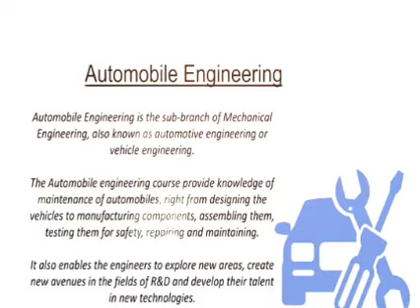It has a brief but vast history, so we'll discuss it one by one. The first automobile powered by an IC engine was invented and designed in Germany during the 1880s. Second, Henry Ford founded the Ford Motor Company and started an era of US leadership in auto production. Ford introduced the Model T, which by 1913 was being manufactured through assembly line techniques.

By 1920, General Motors had become the world's largest auto manufacturer. In 1897 the first car ran on Indian roads, and Hindustan Motors was launched in 1942. Mahindra and Mahindra was established by two brothers in 1945.

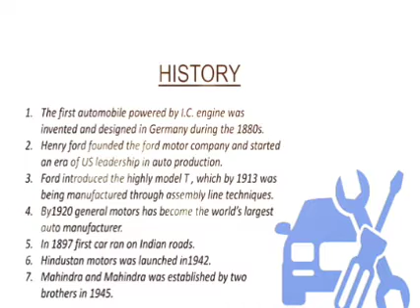Now we'll see the classification of automobiles. Vehicles can be classified on different basis, such as on the basis of load: heavy transport vehicles like trucks, buses, etc.; light transport vehicles like pickups, wagons, etc.; and light motor vehicles like cars and jeeps, etc.

On the basis of wheels: two-wheeler vehicles, for example scooter, motorcycle, scooty, etc. Three-wheeler vehicles, for example auto rickshaw, three-wheeler scooter, and tempo, etc. Four-wheeler vehicles, for example car, jeep, trucks, buses, etc. Six-wheeler vehicles, for example big trucks with two rear axles, each having four wheels.

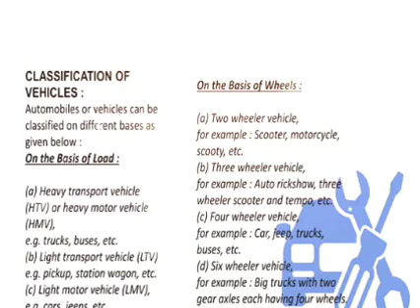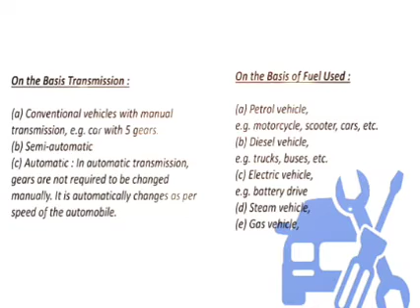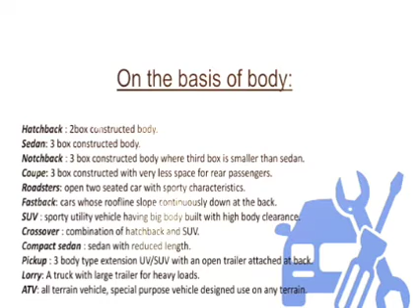On the basis of transmission, and on the basis of fuel used: petrol vehicle, diesel vehicle, electric vehicle, steam vehicle, gas vehicle. And on the basis of body: hatchback, sedan, roadster, fastback, SUV, crossover, compact sedan, pickup, lorry, ATV. Now we'll see the components of automobile.

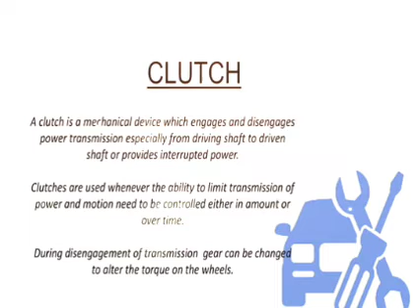The first component is clutch. It is a mechanical device which engages and disengages power transmission, especially from driving shaft to driven shaft, or provides interrupted power. Clutches are used whenever the ability to limit transmission of power and motion needs to be controlled, either in amount or over time. During disengagement of transmission, gear can be changed to alter the torque on the wheel.

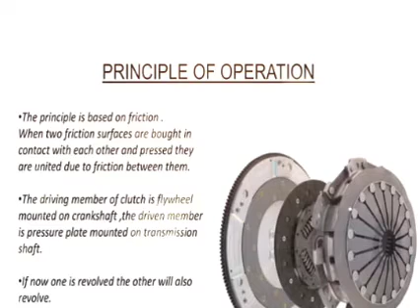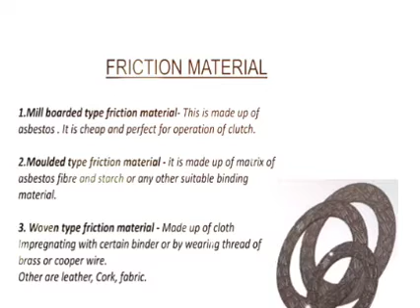We'll also see the principle of operation of clutch. The principle is based on friction. When two friction surfaces are brought in contact with each other and pressed, they are united due to friction between them. The driving member of the clutch is the flywheel mounted on the crankshaft, and the driven member is the pressure plate mounted on the transmission shaft. Now when one is revolved, the other will also revolve. Friction materials include mill board type friction material, molded type friction material, and woven type friction material.

We'll also see one of the components in automobile, that is gear. A gear or a cogwheel is a rotating machine part having cut teeth or cogs which mesh with another toothed part to transmit torque.

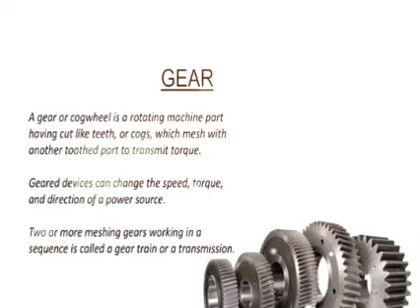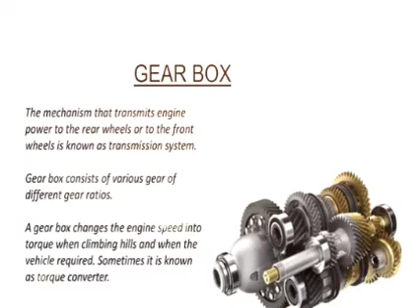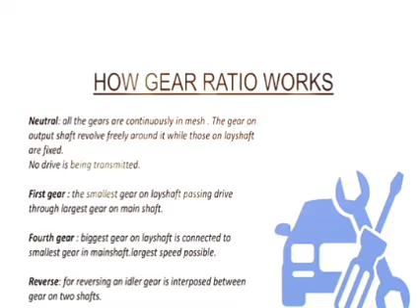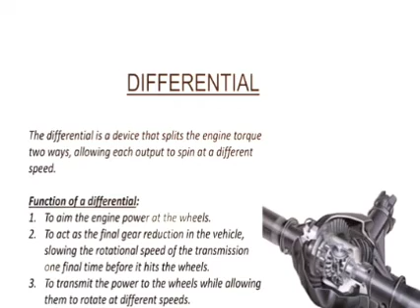Now we'll see the differential. The differential is a device that splits the engine torque two ways, allowing each output to spin at a different speed. The function of the differential is first to aim the engine power at the wheel, and also to act as a final gear reduction in the vehicle, and also to transmit power to the wheels while allowing them to rotate at different speeds. The differential's working is also given.

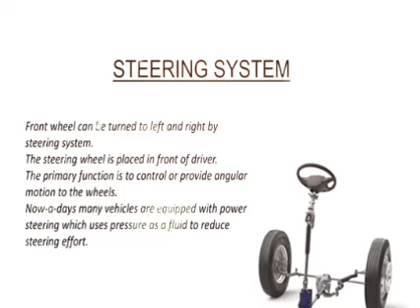Now we'll see the steering system. What is the steering system and what does it do? Front wheels can be turned left and right by a steering system. The steering wheel is placed in front of the driver. The primary function is to control or provide angular motion to the wheel. Nowadays, many vehicles are equipped with power steering, which uses pressurized fluid to reduce steering effort.

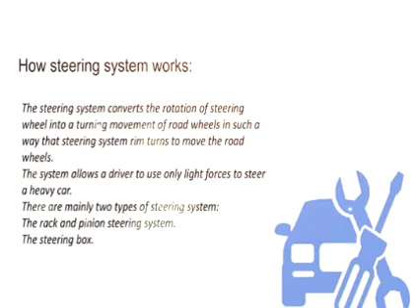How does the steering system work? The steering system converts the rotation of a steering wheel into a turning movement of the road wheels, in such a way that the steering system rim turns to move the road wheels. This includes the rack and pinion system, the steering box system, and the power assist system.

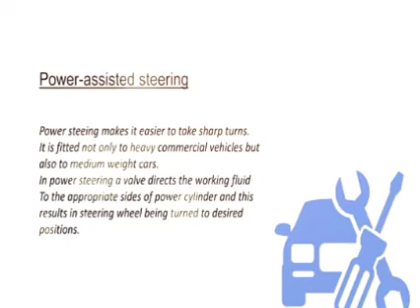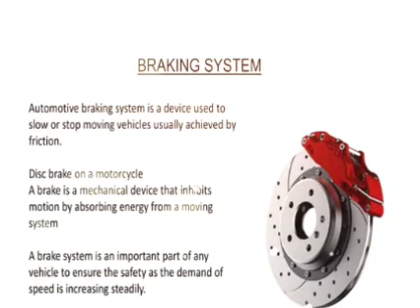Now we'll see the braking system. The automotive braking system is a device used to slow or stop moving vehicles, usually achieved by friction. For example, disc brakes on a motorcycle — a brake is a mechanical device that inhibits motion by absorbing energy from a moving system. In modern cars, brakes are fitted on all four wheels, operated by a hydraulic system. The brake may be disc type or drum type.

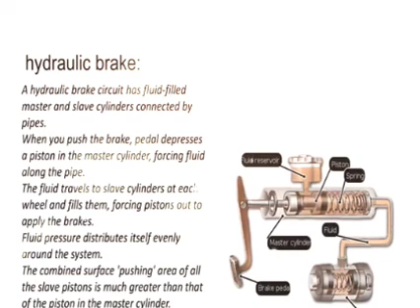Hydraulic brake: the hydraulic brake circuit has fluid-filled master and slave cylinders connected by pipes. When you push the brake pedal, it depresses a piston in the master cylinder, forcing fluid along the pipe. The fluid travels to the slave cylinder at each wheel and fills them, forcing the piston out to apply the brakes. Fluid pressure distributes itself evenly around the system. The combined surface pushing area of all the slave pistons is much greater than that of the piston in the master cylinder. Disc brakes, drum brakes, and anti-lock braking systems are also used.